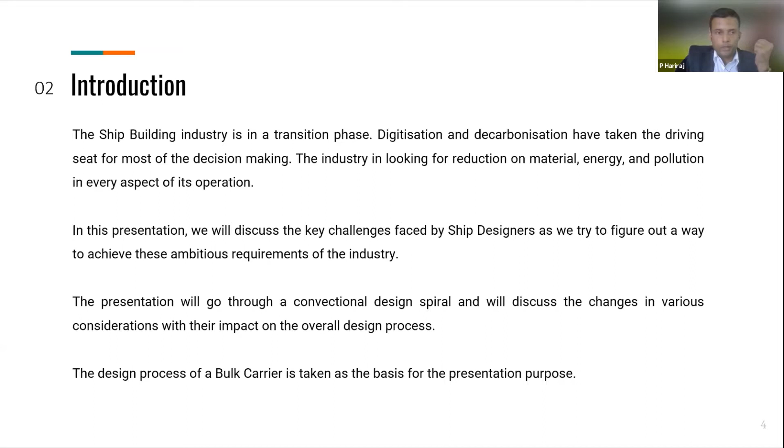We start with mission requirement, then start developing lines plan and main particulars, where a lot of legacy experience was used - experience accumulated by designing similar vessels or operating similar vessels. Then from there we used to go to design of arrangement, structure, powering, estimation of light ship weight, capacities, cost estimate, and it used to go in spirals till we reach the final design required.

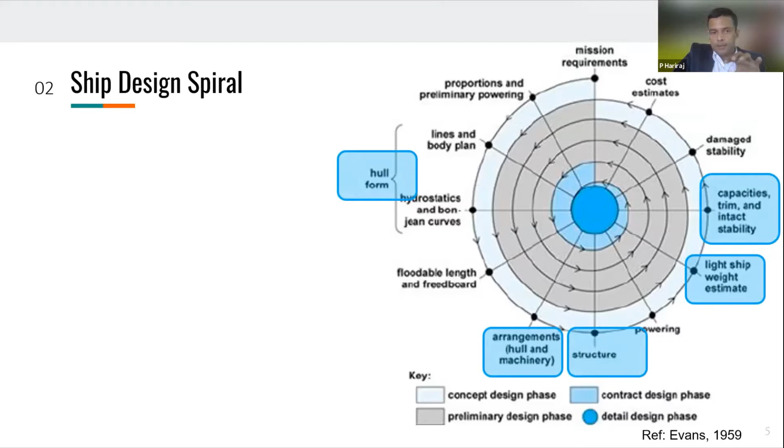Now I am taking some aspects of it, and we'll try to discuss a bit more on how these changes we are seeing are affecting this spiral.

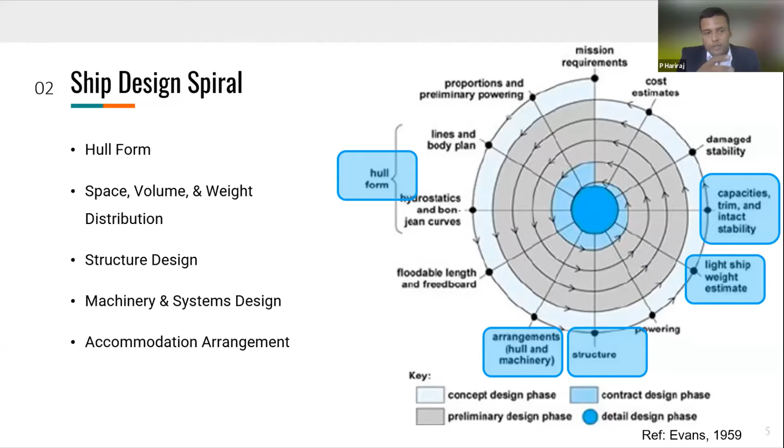This is a very important aspect of any ship design and shipbuilding process, because a standard shipbuilding schedule will reserve some time for design, and that's what the industry is tuned for. When, as designers, we try to meet this or incorporate new technologies, new concepts, new regulations, this spiral doesn't work just like that. It develops a lot of small spirals for each of these key aspects that I've mentioned.

Let's just look at the hull form design, which you can all imagine for any ship - what we see from outside, and what is there below the water. It defines how much cargo it can carry, what will be the fuel consumption for that vessel, what kind of stability the vessel will have, and many other aspects.

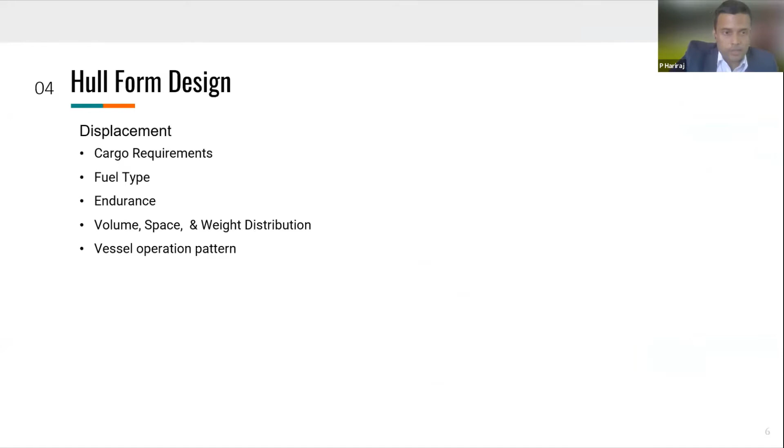So always we say we need to start a design - an owner wants to carry a certain amount of cargo, and there are different segments of designs, which, as you all know, are Handysize, Handymax, Panamax. For each of these designs, there are standard main particulars or ship's key parameters, which have become industry standards because of port draft limitation or port handling capabilities, among many things. If I take a Handysize vessel, it's largely 180 meters in length and maybe around 30 meter beam, and everybody had MGO or HFO as fuel.

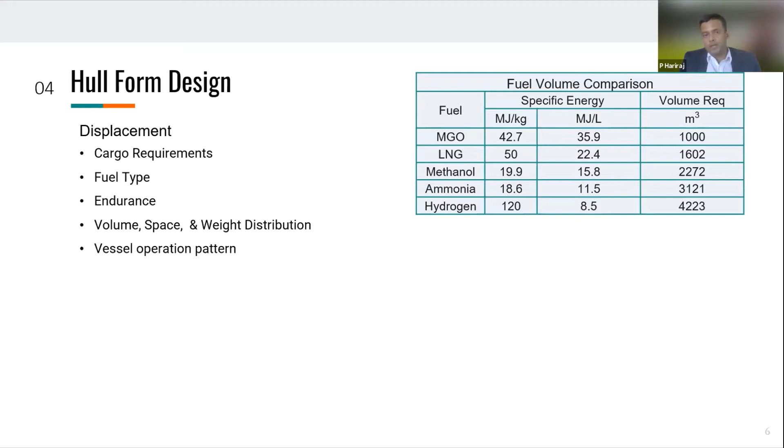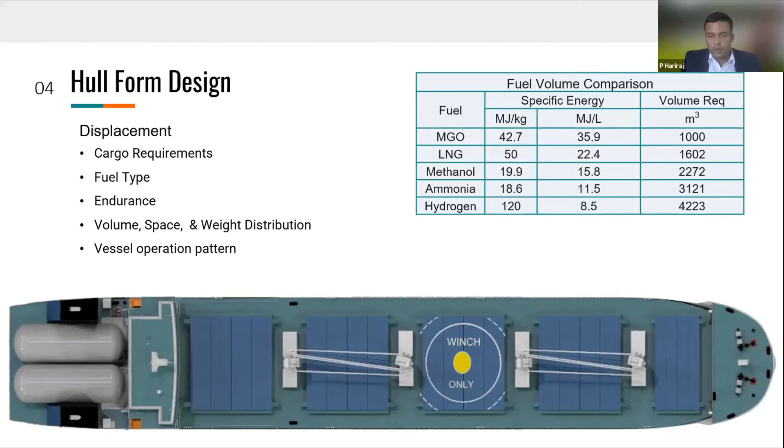Each of these fuels has very large variation - it's not like MGO and HFO. Each fuel is different: LNG needs 1,600 cubic meters, ammonia requires 3,100 cubic meters. So another aspect we discuss is what kind of endurance the design should have. If a ship owner is expecting similar endurance to what he has from MGO, it will be quite a challenge, and an alternative may be to go for lower fuel on board and manage with the operation. But these are all things which have to be discussed, which were not really discussed during this phase of the design previously.

And when it comes to performance, typically we used to design the hull, design the ship, and predict what power the ship will require for calm water. When we say calm water, it is ideal - it is what you do the model test for, where there is no wind, no wave. Then you define the power and add a sea margin to it - typically 15%. So you keep the sea margin and then define your service power requirement, or CSR power, that we all see on vessel specifications. Now, as we go forward, when vessels are being assessed for their annual operational performance and annual carbon emission, people would like to see how the vessel really performs in the expected operational area.

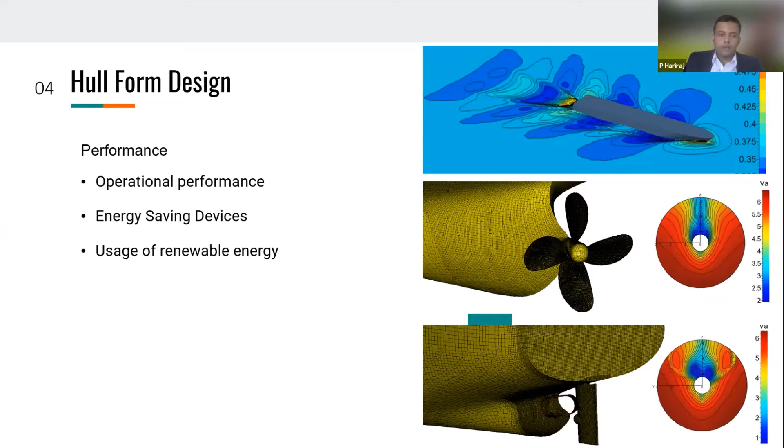If a vessel is specifically designed to operate between Australia and China, you can actually design it more suitable for that area of operation with the present tools and thought process the industry has. I've kept a couple of screenshots of CFD where, 10 years ago, doing CFD with an actual rotating propeller and energy saving devices would have taken too much time and complexity. This has largely changed now due to incorporation of AI and machine learning into the tools, and this can be employed in the design process. However, this takes much more time than typical design development.

Another key factor in the industry now, with IMO guidelines available, is noise - not just internal noise, but underwater noise. It's quite an interesting topic. As designers, we're used to seeing stringent underwater noise limits in defense vessels. But for cargo vessels, especially connected to marine mammal life, noise is part of marine pollution. There are so many things to be done at early stages of design.

There are many other aspects to look into when we design the hull, the mounting of machinery, the pipe supports, and various HVAC systems. It's quite an interesting topic, and a large topic on its own.

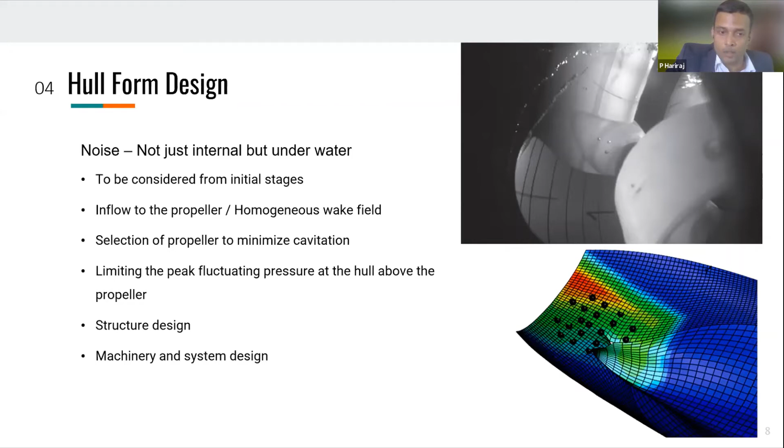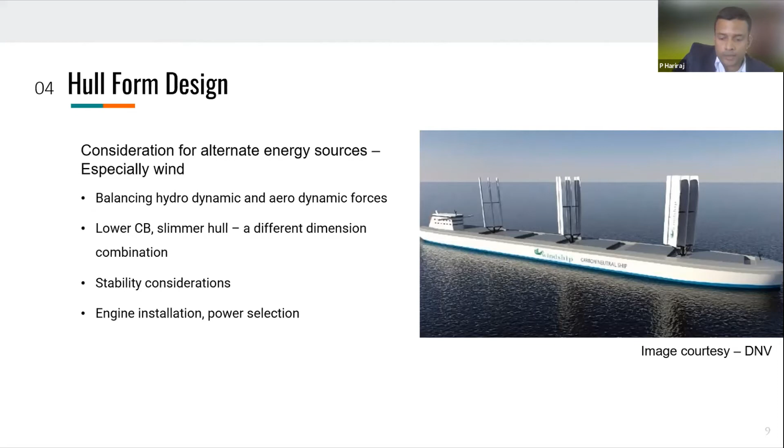The other key aspect is the interest in tapping into wind and wave. I've kept an image from one of the DNV presentations - you can see these projected areas on top. Presently the industry is looking at it probably as a retrofit option, but when we design for predominant thrust from wind, the whole design concept has to change, because you'll have to make it more slender. You need better stability studies for various operational conditions, and you need to consider how you distribute power between the main engine and these assisting units, so you have sufficient maneuvering capability in port. All these discussions have to happen much earlier in the design - which is kind of completely new.

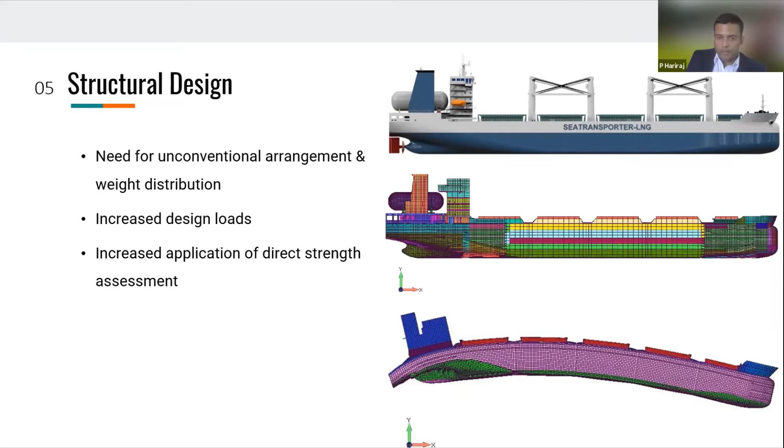When it comes to structure design, I've kept a typical case of LNG, but it can be very similar for ammonia or even methanol, especially for bulk carriers, where you don't want to consume your cargo cubic, because that's what earns for you. When you start designing, you have certain bending moments to consider, and you're directly adding a lot of weight. You're designing a vessel with more design bending moment, plus more requirements - imagine a large volume of fuel moving with the vessel in different operational conditions. So we have to study sloshing more, associated vibration more, and even with cryogenic fuels, how you study the temperature gradient and the boil-off gas connection, and many aspects like that.

It's definitely interesting, but each of these is quite challenging, because these are not normal skills that a typical design company keeps with them. One option is you start learning everything and build a team, or another would be more and more collaboration, which looks like the way forward for the industry.

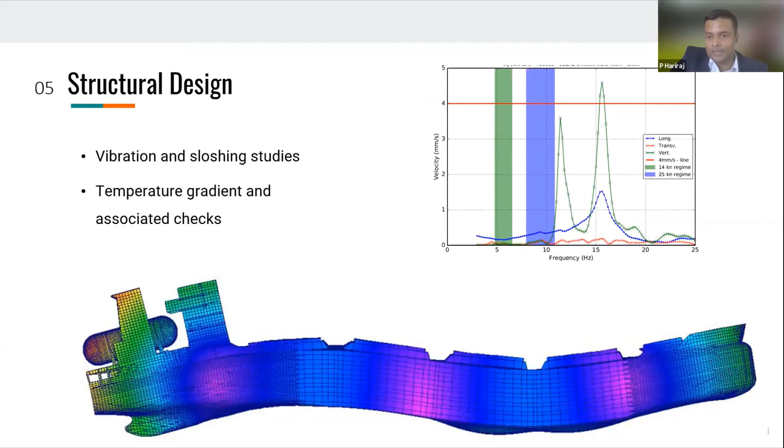I will skip this. And when it comes to machinery and system design, I

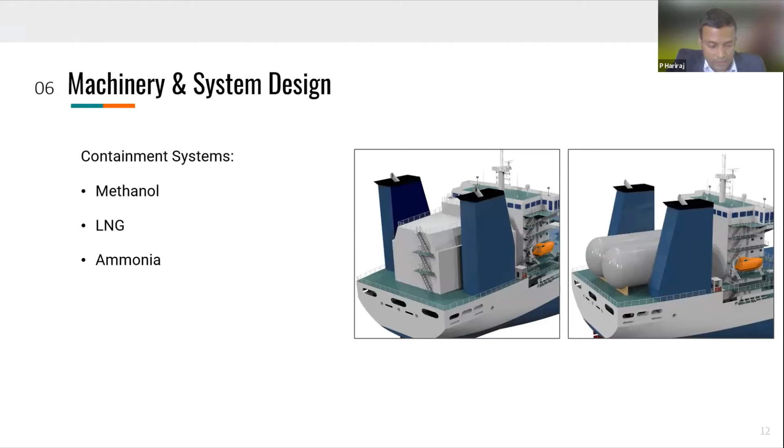And at this point, the most difficult part or most interesting part that we see is nobody's clear of what should be done. So we try to design a ship which can do whatever it comes, which is quite a large band to work with. And for all these fuels, there are more fuel handling systems, and there are more systems to manage, say, a boil-off gas.

So if you can go for a cryo cooler to cool the boil-off gas in certain systems, or you want to have some different gas consumer, you can go for that. The bunkering has to be seen completely different. It's the position, the relative positioning compared to accommodation and machinery system, everything has to be seen.

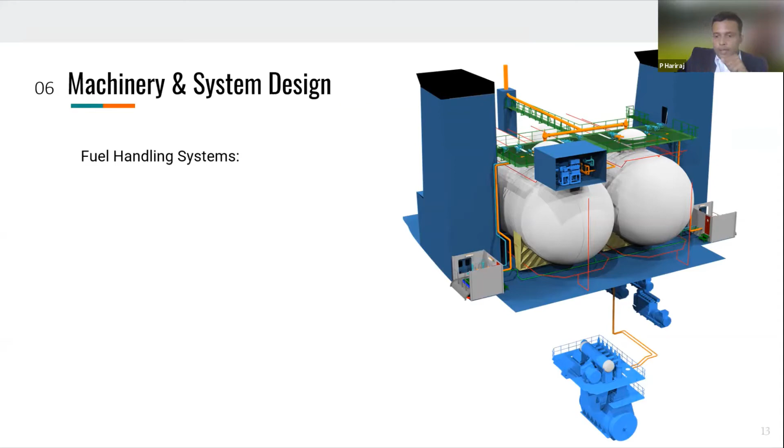And then you have relatively large fuel gas or fuel preparation room before it can be directed to the engine, which takes in more space. And when it takes in more space, you're actually moving away from the conventional accommodation arrangement that you can have on these kind of cargo vessels.

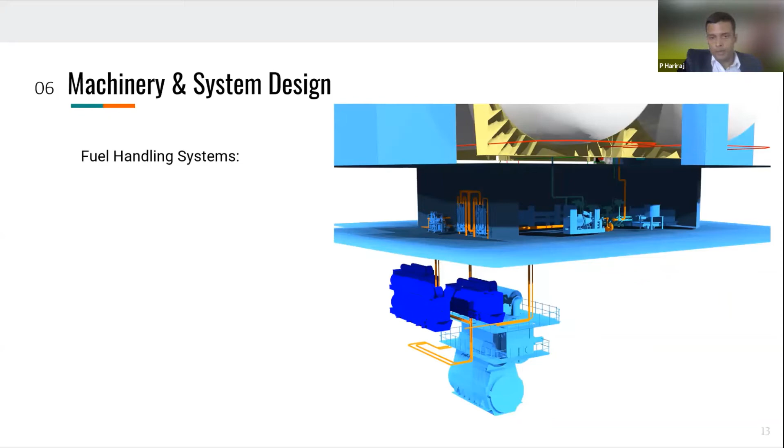And also there are key issues which of course I have not gone into details of how each of these fuels can be incorporated. But one typical example is where you keep the vent mast for LNG or ammonia. It has to be certain meters away from your air intake, and there are many specific requirements that you have to see, which are quite iterative and which also require a lot of discussion between suppliers, equipment suppliers, the classification societies, the flag state.

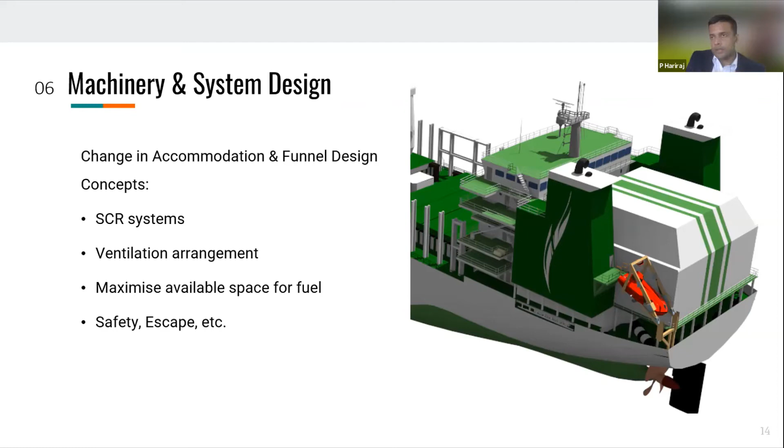In fact, when we did the first LNG fuel bulk carrier design, we had to discuss directly with the US Coast Guard, because it was not clear how they will treat an LNG fuel vessel in US waters. So when each of these new fuels and new technology come into the ship and we try to incorporate them, we will have to take into confidence a wide range of interested parties in our early stage discussions.

And going digital, of course, this transformation of design from desktop, working on papers, I think it happened quite long before. Now, what I have kept here is one of the designs where you start with your hull form development, CFD, your 3D model, your FE analysis. So you do the entire thing, but now we will have to go to the next step, because the shipbuilding industry as such is trying to move to this industry 4 concept of more integrated design and engineering process.

where there are a lot of artificial intelligence and machine learning applications. The VR, in fact, most of the design tools that we use have incorporated VR into their design philosophy.

So it's more easy for the customer to see what is there and to feel what is in the design. In fact, we can have the ship built in the computer, on the drawing board, with much more details when we start collaborating with various stakeholders and define the kind of digital twin at a very early stage, which can be used by the shipyard as well as the ship's end user for construction and maintenance aspects of the vessel.

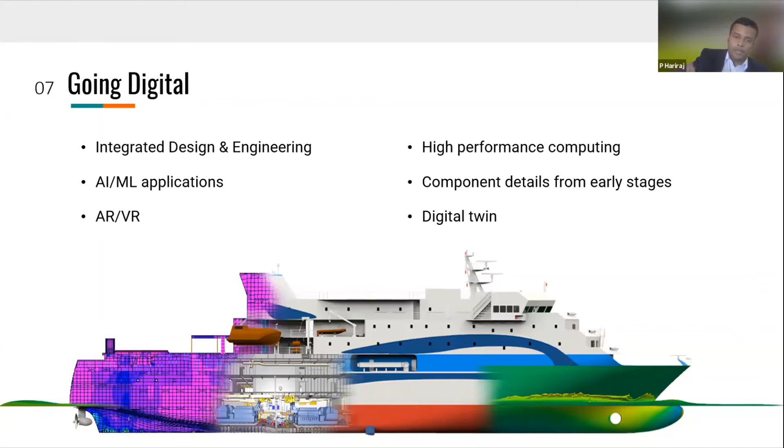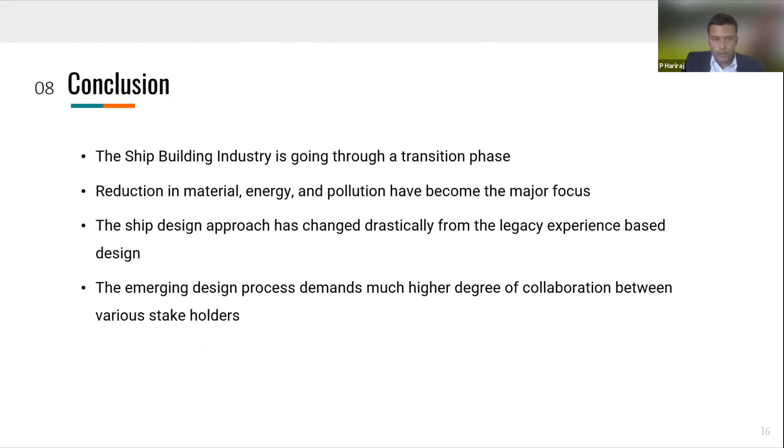So just to conclude, as we have seen, the industry is going through a huge transition phase with a clear focus on reduction in material, energy, and pollution. The ship design approach has changed drastically from the legacy experience-based design process, and the emerging design process demands a much higher degree of collaboration between various stakeholders in the industry. So thank you so much.

I'm ready to take any questions if you have. Thank you, Hariraj. That was again a very detailed explanation on what the new naval architect's challenges are. Could you please post your questions in the Q&A box so that we can address them?

I would like to begin with something that one of the participants had raised with Sandit's presentation, where they were asking how should a new naval architect approach the industry. From what you are saying now, there seems to be a very interesting and lucrative future for naval architects, because there's a lot of work that needs to be done in order to meet all the design requirements.

Yes, definitely. It's quite an interesting phase, and I think when you look at many of these aspects, anybody in the industry who has been in it for quite some time is kind of the same as a newcomer. In fact, I feel students have more flexibility and more opportunity to learn more, because they really don't have actual work to do. They can prepare themselves better.